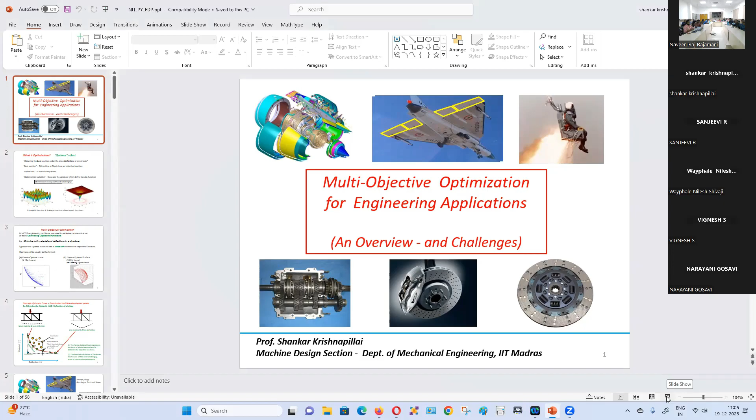Okay, first sir, we can put it in slideshow mode. Okay, I think I'll switch off my camera first. Okay, so here. Sir, we can put it in slideshow mode also, sir. Okay, yes, okay, okay.

This topic of multi-objective optimization is highly important due to two reasons. First, multi-objective optimization occurs in almost all engineering applications, especially in mechanical engineering. You can see some devices here: this aircraft engine, the aircraft wing, the seat ejection, the gearbox, brake and clutch, and all these things. Actually, all these things are multi-objective in nature.

Another important thing is that not many people are aware of multi-objective optimization. Many people in India are aware of the finite element method and things like that, but the knowledge about multi-objective optimization is less. Because of this, I would like to give a talk on this topic. Of the several examples shown here, we'll discuss some of them later in the lecture.

So first we look at the theory and the basics. What is the meaning of optimization? In the Latin language, optimus means best. So optimization means obtaining the best solution under the given limitations or constraints. As far as optimization is concerned, the best solution means either minimizing or maximizing an objective function.

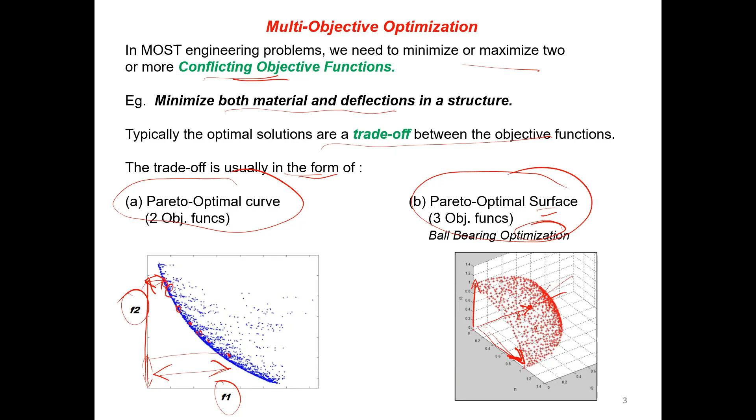Then the concept of Pareto curve, and the meaning of dominated and non-dominated points.

Actually, the top part of the slide is being covered by the menu. How to remove it, I don't know. Okay, so...

What is the meaning of Pareto curve and the meaning of dominated and non-dominated points? So we are going to look at this example. We want to minimize the material, and also minimize the deflection of a bridge, that's a structure. So you have two extreme options.

Either you can have more material and less deflection. Here you can see that the bridge is quite thick, so it has more material, so naturally it is more stiff and will have less deflection. On the other extreme, you can have a bridge made of less material, that is thin members, so naturally the deflection will be more. Both of these will satisfy the conditions, but it is a trade-off between material and deflection.

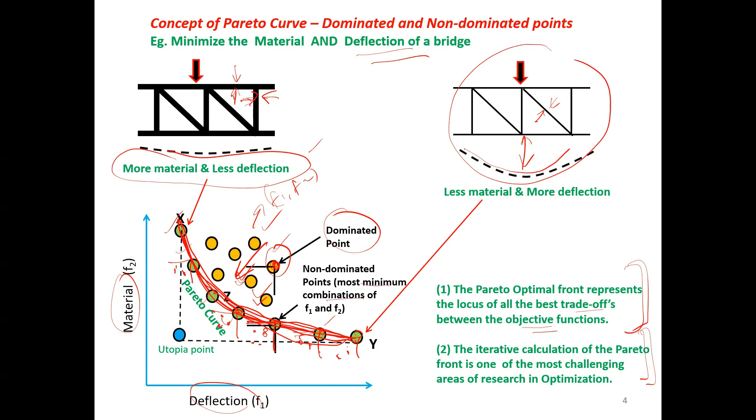Okay, so we can look at some examples of this multi-objective optimization. Some frequently used examples. The light combat aircraft wing optimization we'll study later at the end of the lecture.

Now let us look at this commonly done optimization of the gearbox. Multi-objective optimization of gearbox is a great area of research. Basically, you want to minimize this envelope of the gearbox, and at the same time you want to maximize the power output. So those are conflicting objectives.

What will happen is that if you want to reduce this overall size of the gearbox, then the diameters of the gears has to be reduced, and the center lines will come close to each other. Now when the diameters of the gears are reduced, then the torque is decreased.

So to increase the torque, you have to increase the tangential force F on the teeth. But when you increase the tangential force F on the teeth, the teeth will break because the gear has become smaller. So it is a conflicting objective function. As you reduce the diameter of the gear, it cannot transmit much power because it can only withstand a smaller value of tangential force at the teeth.

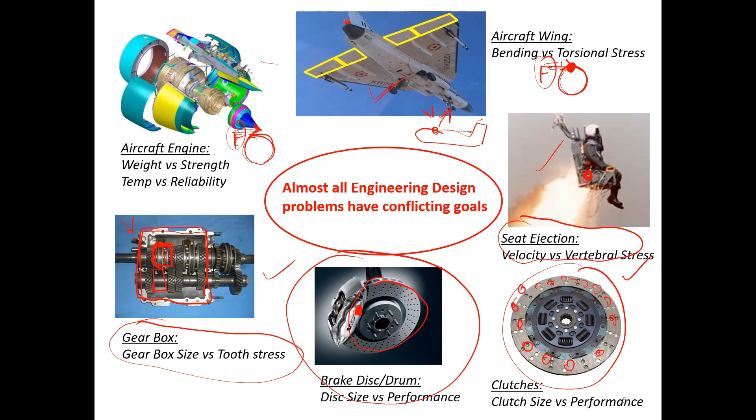But when you increase the ejection velocity, the spinal stresses will increase, and the pilot may suffer some severe injury due to the failure of the lumbar vertebra. So it is a conflicting objective function - first you want to maximize the seat ejection velocity, and then you have to minimize the injury to the spine. So these are some typical examples of multi-objective optimization.

Then a brief analytical look at the Pareto front.

Okay, so where does the Pareto front come from? And why does it stop at a boundary? Where does this blue Pareto front come from, and why does it not go down like this? It can go down like this, so why does it stop here? That is what we are going to look at.

First we look at the statement of a multi-objective optimization problem: minimize the two conflicting objective functions f1(x) and f2(x). x is the vector of design variables like length, breadth, height, etc., and x is a subset of real numbers, meaning these variables can theoretically take values from -infinity to +infinity. Obviously we engineers take only 0 to +infinity, but as per the original mathematical formulation it can vary, though you can put a constraint saying the variables vary from 0 to infinity.

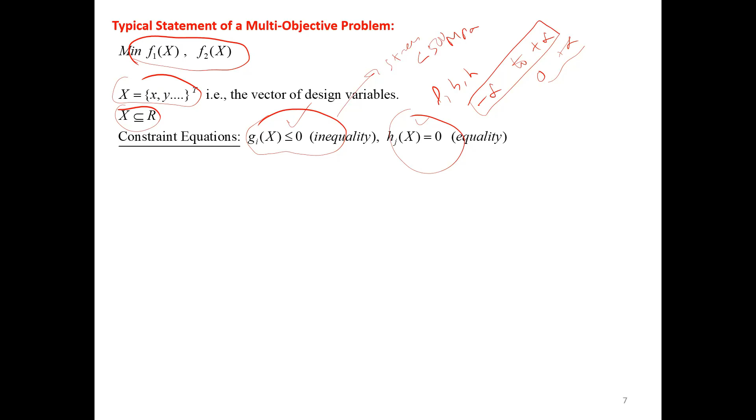And then you have some constraint equations, inequality constraints and equality constraints. For example, stress should be less than or equal to 500 MPa - that is one inequality constraint. Equality constraints can also be given. So this entire thing is the definition of a multi-objective optimization problem.

Now let us look at how do you get the Pareto optimal front. Let us look at all possible values of x and y. So x is here, y is here, and all possible values of x and y occur in this constraint region. One example is x1, y1 here. All possible values of x and y occur in this blue region.

Now suppose I want to minimize f1(x). These are the contours of the objective function f1 of x and y, and this is the nearest point on the feasible region from the center of the objective function f1. So this red point is the minima of the objective function f1. Similarly, you have another objective function f2, and this particular red point is the minima of the objective function f2.

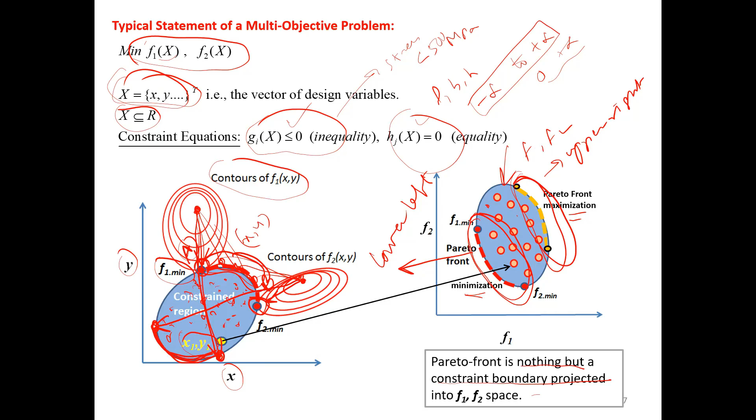And if you want to maximize f1 and f2 - looking at this figure, what is the maxima of f1? Maxima of f1 will occur here, and the maxima of f2 will occur here, because that is the longest distance from the objective function. So this area is the maximizing Pareto front, and that will come here. So that is the explanation for the Pareto front - it is nothing but the constraint boundary expressed in f1, f2 coordinates.

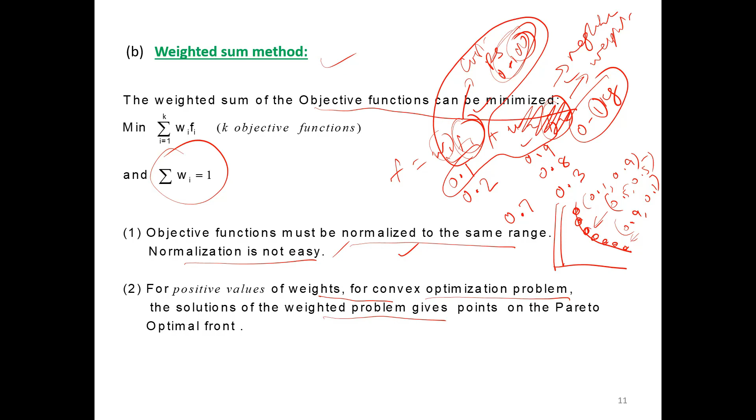So this is the Pareto optimal front. All these points can be obtained by different values of weight, say 0.1 and 0.9 here, 0.9 and 0.1 there, and 0.5, 0.5 in the middle. By changing the various values of weights, we get various points on the Pareto optimal curve.

As I said earlier, normalization of the objective function is not easy. The weighted sum method itself appears very simple — you just write W1 F1 plus W2 F2 and minimize the combined objective function — but normalizing F1 and F2 is not easy.

Let's look at some methods of normalizing the objective functions. The first method is to divide each objective function by the maximum value of that objective function within the feasible region. So if Fi(x) is objective function i, Fi_max is the maximum value of that objective function within the feasible range, and Fi_min is the minimum value within that feasible range. You have to find these values by a separate minimization and maximization of each objective function.

Another method of normalizing the objective function into the range 0 to 1 is: Fi(x) minus the minimum value of the objective function in the feasible region, divided by the difference between the maximum and minimum value of the objective function within the feasible range. As you can see, this is not easy — you have to do an individual minimization and maximization of each objective function to find its range.

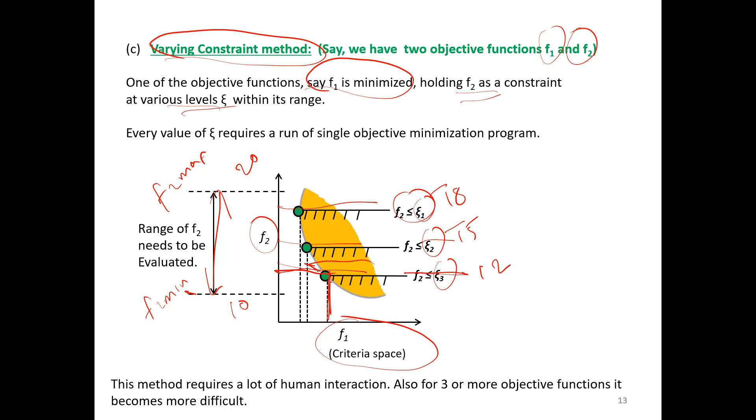For each case, you minimize F1 alone while keeping F2 at a particular level. The minimum value of F1 is this green point, which is a point on the Pareto curve. Similarly, for F2 equal to 15, if you minimize F1, the smallest value is another green point on the Pareto front. By slicing at various heights this way, you obtain all these Pareto points through single-objective optimization of F1 at various levels.

This method requires a lot of human interaction — first you have to find F2 minimum, F2 maximum, and divide the range into various slices. With two objective functions this is somewhat manageable, but with three or more objective functions it becomes extremely difficult.

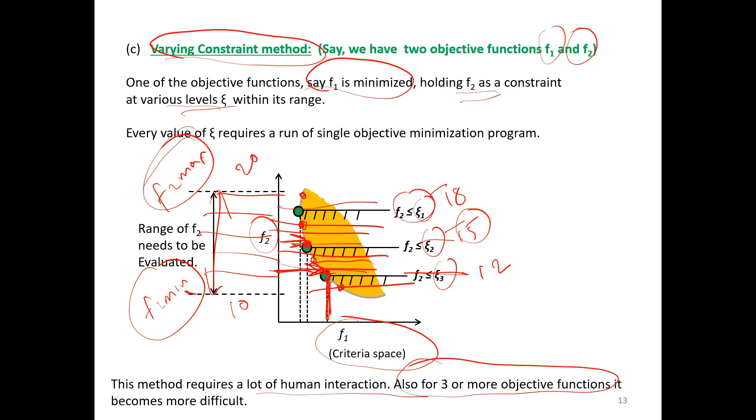Another method is called goal programming. It's a practical method used by engineers who don't want to find the Pareto curve. Here the objective functions are simply given some known numerical goals, and we check if the objective function can reach those values.

Suppose we have two objective functions, F1 and F2, and we don't want to find the entire Pareto front. We just want to check if the objective function values we want will lie on the Pareto optimal front. So F1 and F2 are two objective functions. Suppose F1 is stress and F2 is displacement.

So we give some goals. Stress should be less than or equal to 500 MPa, and displacement must be less than or equal to 2 mm. These are goals which we give from prior knowledge, and we see if the objective function can attain these goals. So the program is rewritten like this.

This objective function becomes an equality constraint. We add one slack variable, S1. A slack variable's value cannot be less than 0, it's always greater than or equal to 0. So we add slack variable S1 to F1, so that F1 plus S1 equals G1, and S2 to F2, so that F2 plus S2 equals G2 - that is the goal. So if S1 equals 0 and S2 equals 0, then our goals are attained, and F1 will equal our goal and F2 will equal our goal.

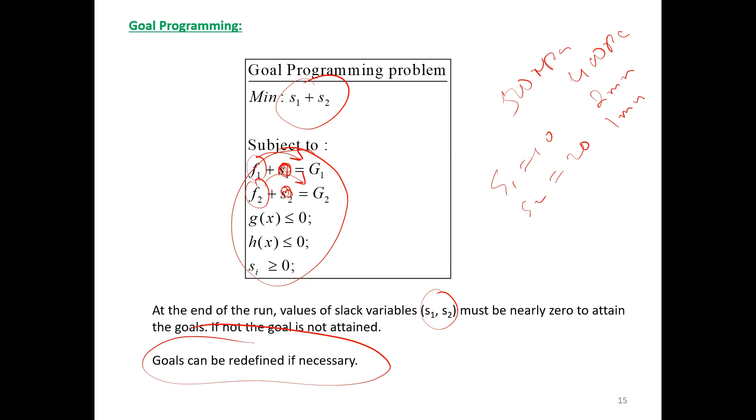And if S1 and S2 are not equal to 0 - suppose S1 is 10, S2 is 20 - then there is a slackness or gap of 20 in attaining the goal. So what you have to do is change the goals. Instead of giving 500 MPa, you change it to 400 MPa, and instead of giving 2 mm displacement, you give 1 mm displacement, and try again to see if those goals are attainable.

Heuristic algorithms are preferred over conventional methods because of generality - you can give any number of objective functions, not just 2, you can give 3, 4, 5, 6 objective functions as well as any number of constraints. And ease of use means you can use it like a black box - black box means you're not interested in the internals of the problem. It's also very robust and applicable to non-convex problems.

A non-convex problem means the objective function has many peaks. Heuristic method means rule of thumb or an approximate method. Genetic algorithm based methods exist, and particle swarm, ant colony, cuckoo search based methods also exist. We'll just look at genetic algorithm based ones because they are older and more tried.

Various types of genetic algorithm based methods exist, like VEGA, random weight genetic algorithm, NPGA, NSGA, NSGA2, NSGA3, etc. These various types of genetic algorithms can be used to do multi-objective optimization. And another important thing is that when you do multi-objective optimization, you have to check the algorithm's performance.

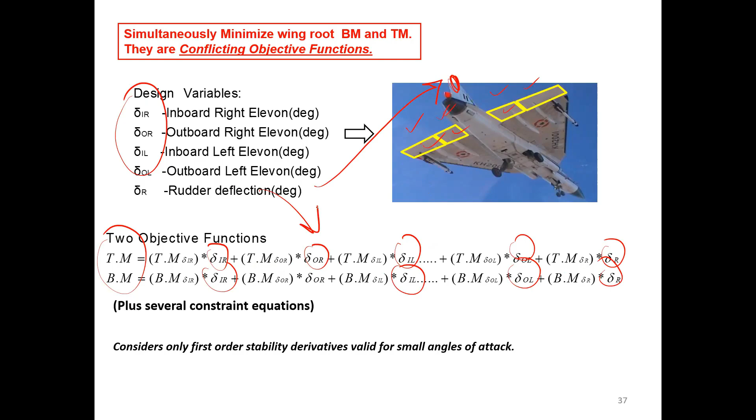Then a large number of constraints are there - a large number of inequality constraints and a large number of equality constraints. Then some variable ranges are there: elevon deflection must be between minus 25 degree and plus 25 degree. Then actuator forces should be less than or equal to 10 tons, since each elevon has an actuator, so the actuator forces must be less than 10 tons.

This is done with the help of a CFD package. The values from the CFD package are used to do the optimization. So why are bending moment and torsional moment conflicting?

The aim is to reduce the bending moment at the tip. You can see that the bending moment at the tip of the unoptimized wing is very large, so the wing will break. So you want to reduce the bending moment at the tip and increase it at the root, because the root of the wing is strong. So you have to adjust the elevon deflection so that you get this distribution of the wing forces.

This distribution is the crux of the issue. When you try to shift the wing loads towards the root of the wing, the torsional moment increases.

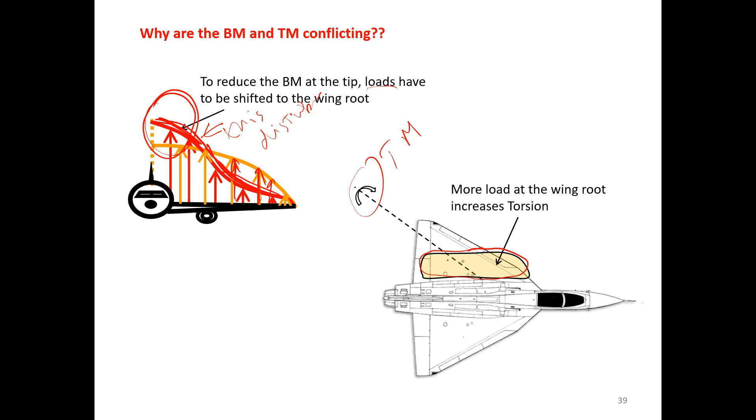So it is a conflicting objective function. When you try to reduce the bending moment at the wing tip, the torsional moment at the wing root increases. As a result of this multi-objective optimization, the combined bending moment and torsional moment has been reduced when compared to the original values.

Because these are the original values, the values have been reduced. How is it reduced? Now we take one particular load case, choosing the optimal values of bending moment and torsional moment for a typical load case. This is one of the typical load cases of this plot.

All these are various load cases. I'm showing you one of the load cases. So you can try to obtain the Pareto optimal front of the bending moment and the twisting moment for this case.

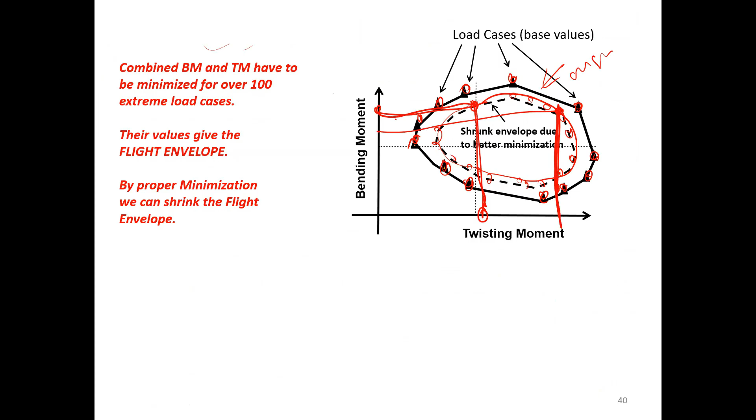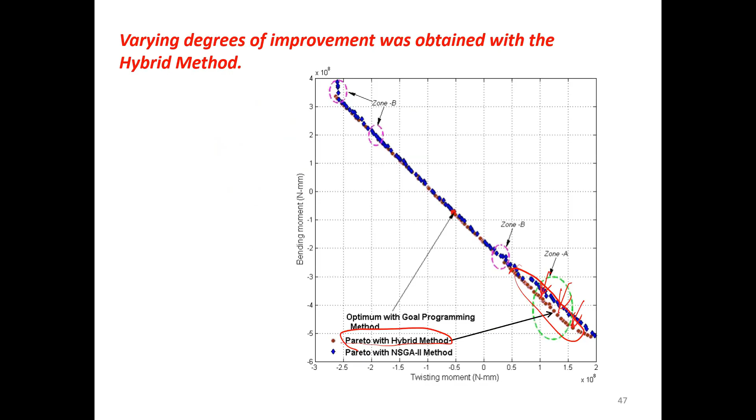So these optimized values will be stored in the plane's computer. When that particular load case comes, the elevator values as decided by the multi-objective optimization will be fed to the ailerons, and it will minimize the wing root stresses.

So can we stop here, or is the time over? Maybe we can continue for another 10 to 15 minutes. Okay.

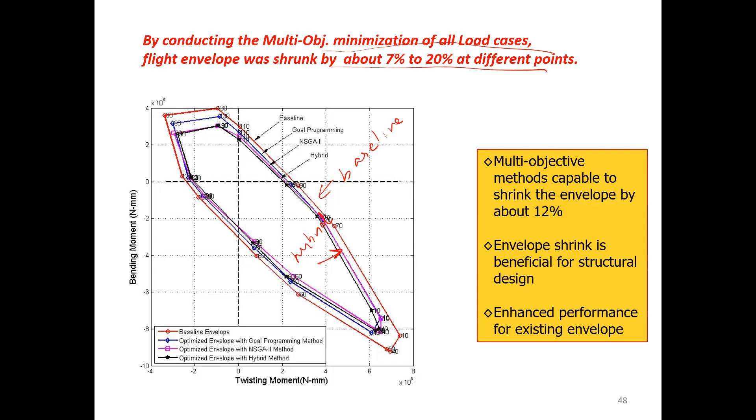So this is the example of multi-objective optimization of the aircraft trim. Next we look at one example: propulsion shaft realignment of a warship. This is an Indian Navy project.

Here, goal programming alone was used. This was done as an MTech project under my guidance, and the particular student was from the Navy, and he was given this project by the Navy to do - propulsion shaft realignment of warships.

So what is the importance here? In a new warship, before it comes for duty, the propulsion shaft will be perfectly aligned, so it will be a straight line like this. Then after a couple of years of operations, these are all bearings on which the shaft is supported.

So after a couple of years of operation, some of these bearings may move up, some may move down, and so on. The movement of the bearings can be delta 1, delta 2, delta 3, delta 4, delta 5, delta 6, etc. As a result, the shaft becomes slightly warped up and misaligned. So then the bearing reactions, F prime, will become undesirable.

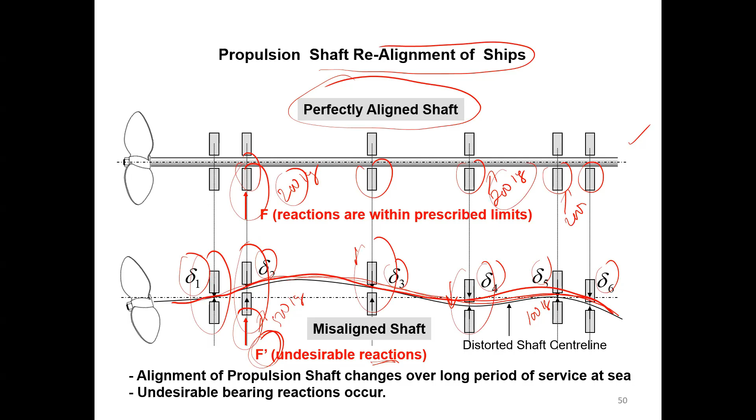So the usual situation is that shaft alignment checks are done in the dry dock once in a while. After about 5 years of service, the ship will be brought to dry dock. Dry dock means there will be no water under the ship, so the ship bottom will be dry. Then the bearings are moved up and down by trial and error, and the bearing loads are checked with load cells. The load cells should indicate 200 kilogram per bearing.

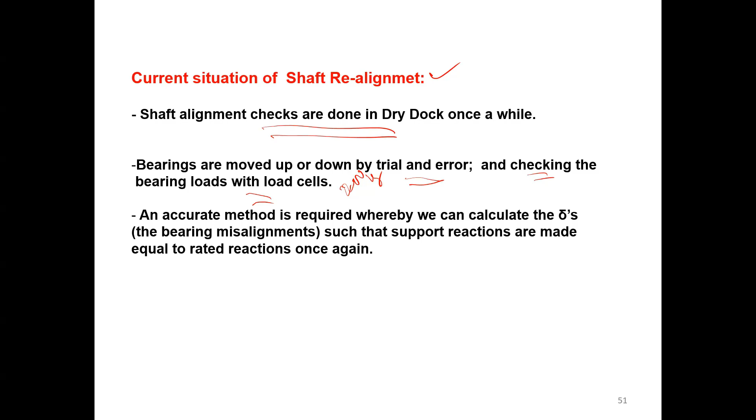Until then, by trial and error, you have to move the bearings up and down, and mainly by luck, after several hours of testing, you can get all the bearing support reactions back to 200 kilograms. So that is the current method. An accurate method is required whereby we can calculate the deltas, that is the bearing misalignment, such that the support reactions are made equal to the rated reactions once again.

So what we propose to do is find some method of determining delta 1, delta 2, delta 3, delta 4, delta 5, etc. Then you move each bearing in the opposite direction. Suppose delta 1 is equal to plus 5 mm, meaning one bearing has moved up by 5 mm, then it has to be moved down by minus 5 mm.

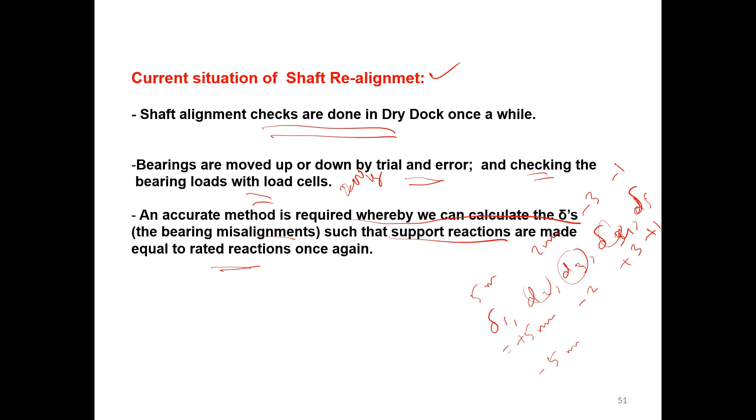Each of these delta values can be found out, like 5 mm, 2 mm, minus 3 mm, minus 1 mm, and then the opposite displacement can be given to the bearings to make it come back to the original horizontal level. So how is this done?

What is done here is that strain gauges are stuck on the propulsion shaft in the beginning, that is when the shaft is a straight line and before any misalignment. So you can see the bearings here, and you can see that the shaft is simply supported at each bearing.

So in each span, 2 strain gauges are stuck. And these strain gauges are zeroed to give a zero strain, that is before any bearing misalignment, of course.

So now the total bending moment of the shaft is the bending moment due to self-weight plus the bending moment due to misalignment. The bending moment due to self-weight can be easily calculated from the theoretical model of the shaft. The shaft manual will give the diameter, material, and length of the shaft, etc. Once you know the density of the material and these things, you can calculate the bending moment due to the uniformly loaded shaft, or the bending moment due to self-weight, from the theoretical model of the shaft in the operation manual.

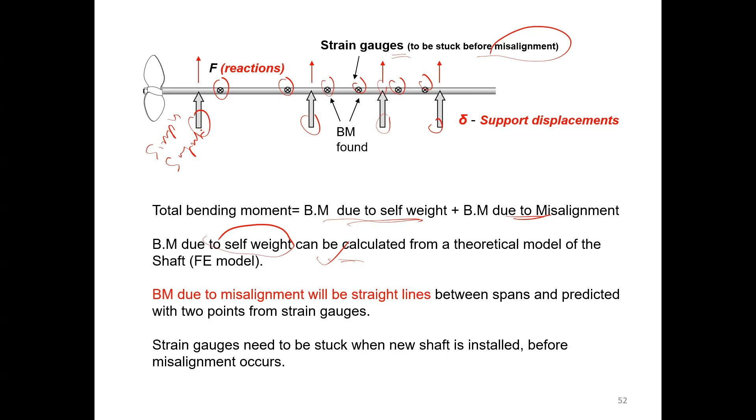Then the bending moment due to misalignment will be straight lines, because it is simply supported at these spans. The bending moment due to misalignment will be straight lines like this, so 2 strains are enough. The 2 strains calculated by the strain gauges are enough to obtain the straight line bending moment between 2 support points.

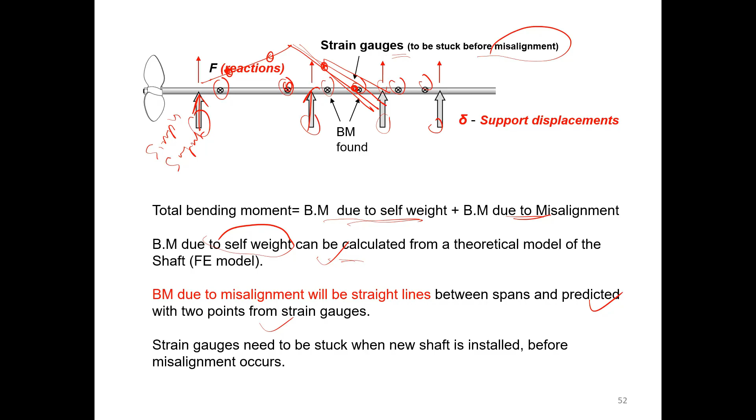This can be obtained by the strains predicted at strain gauges between the two spans. As I already told you, the strain gauges are set to zero strain before the misalignment. So any strain in the strain gauges is due to misalignment only, not due to self-weight. That is the importance of sticking the strain gauges.

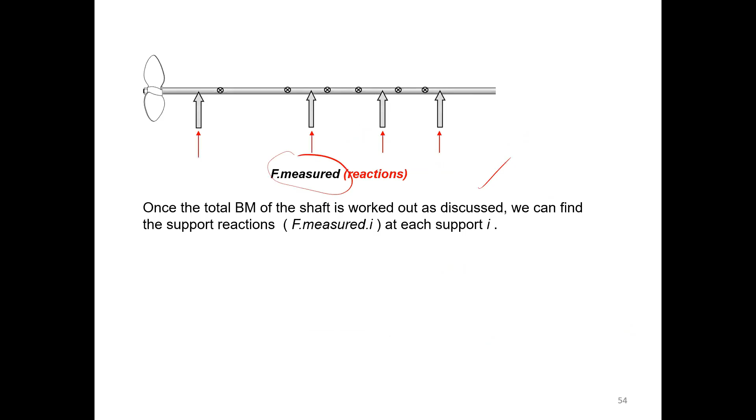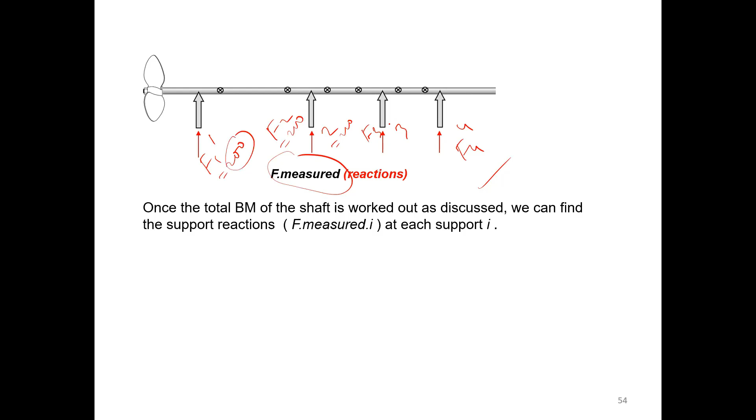Once the total bending moment of the shaft is worked out as discussed, we can find the support reactions — the measured support reactions without the need for any load cell. At each support, support 1, support 2, support 3, support 4, we can find F1, F2, F3, F4. The ideal value of F1 must be 200, as per the manual. So the goal is 200 at each shaft, at each support point.

Now we pose this as a goal programming problem. The objective function at each support is the support reaction, and the goal at each support i is the support reaction as per the shaft specification in the manual — suppose 200 kg. The goal is that each support reaction must become equal to 200 kg. The optimization variables are the bearing displacements, delta 1, delta 2, delta 3, delta 4, etc.

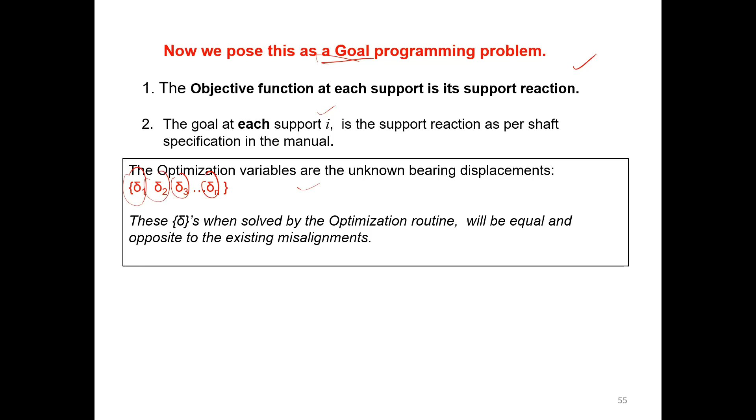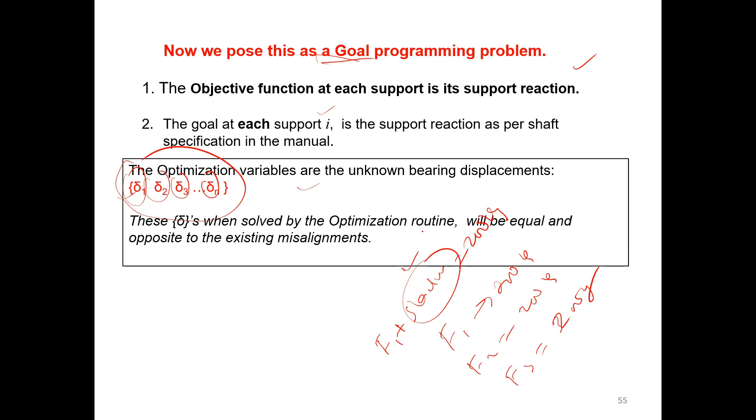The problem is posed such that you change delta 1, delta 2, delta 3 so that F1 equals 200 kg, F2 equals 200 kg, F3 equals 200 kg, etc. So F1 plus a slack variable equals 200 kg, and we try to minimize this slack variable. We can find the values delta 1, delta 2, delta 3 which minimize the slack variable to zero.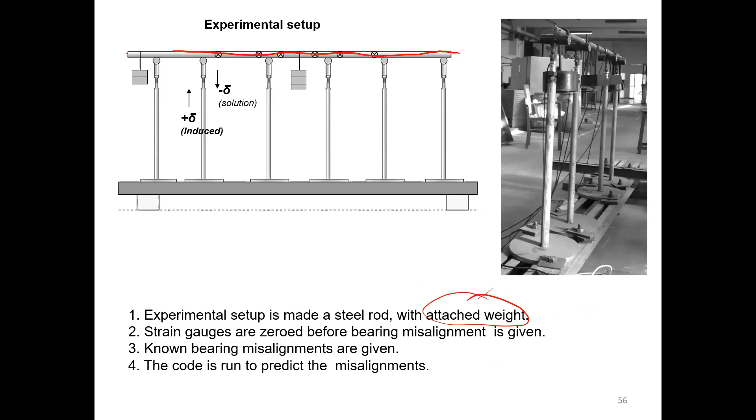To test this algorithm, a standard setup was made of a steel rod with attached weight. This attached weight is to simulate the self-weight of the shaft. This is the steel rod, supported at various support points like this — each of them representing a bearing.

The strain gauges are set to zero values before any bearing misalignment is given. First the shaft is made perfectly horizontal, and all these strain gauges are set to zero values. Then after that, bearing misalignments are given.

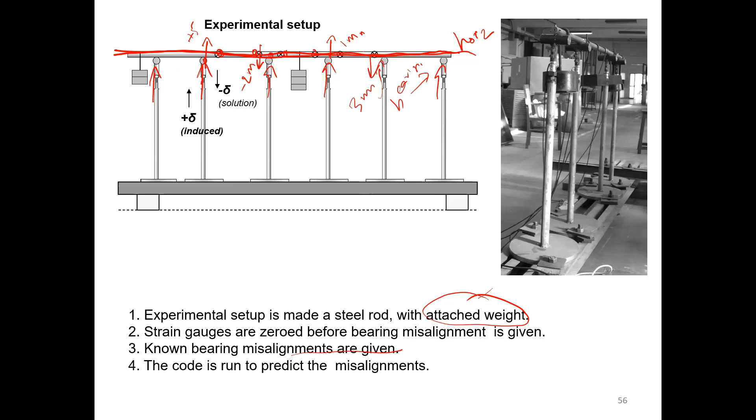This support point is lifted up by plus 5 mm, this support point is brought down by 2 mm, this support point is brought up by 1 mm, and this support point is brought down by 3 mm, etc. So the various delta values are given, and then the algorithm must predict the equal and opposite delta values to move the bearings in the opposite direction. Here you can see some of the trial runs of this.

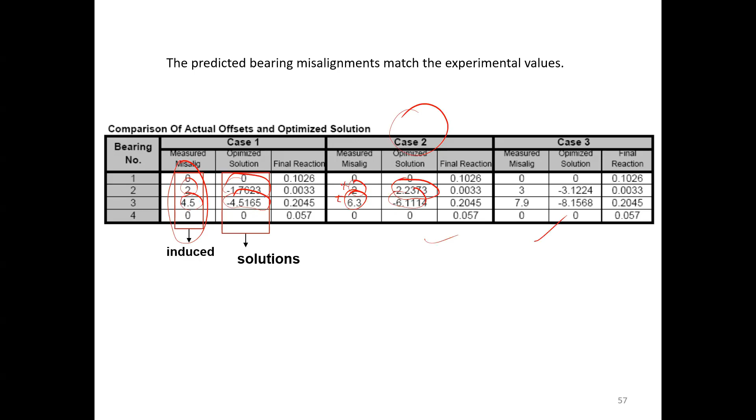Then another case, case 2: the second support point is moved up by +2 mm, and the algorithm predicts -2 mm, meaning the bearing should be moved down by -2 mm. The third bearing support is given a +6.3 mm lift, and the algorithm predicts -6, meaning the bearing has to be moved down by -6. By doing this experiment, we are able to verify the application of this goal programming method for propulsion shaft realignment.